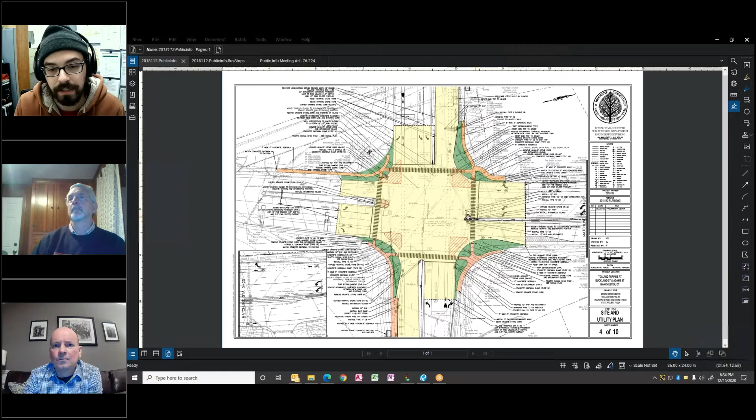Zoom in here a little bit. So as Jeff mentioned, the main change that'll be most obvious to everybody is the removal of the channelizing islands. There's a channelizing island on each corner today that causes some issues with confusion relating to the control and operation of the intersection, so the goal is to remove these in their entirety. As part of that, we're able to tighten the intersection up a bit by bringing the radius of the right-hand turns closer to the center of the road to improve that.

As you're probably aware, we recently did some work on Adams Street, some repaving and restriping. Our plan is to continue the new sidewalk we installed up to the intersection, to create some new crossings on the west side across Tolland Turnpike. The plan is to provide some directional crosswalk ramps and make revisions to the dividing median islands that are currently out there as well.

It'll be a standard traffic signal, and the operation will be very similar. However, we'll be adding some of the same features that we have at the sister location. We'll be proposing another flashing right turn arrow to coincide with the right turn movements against the crosswalks. There'll be blank out signs for no turn on red during periods when pedestrians are crossing with the major through traffic movements. It'll also likely include internally illuminated street name signs to help with better guidance through the intersection.

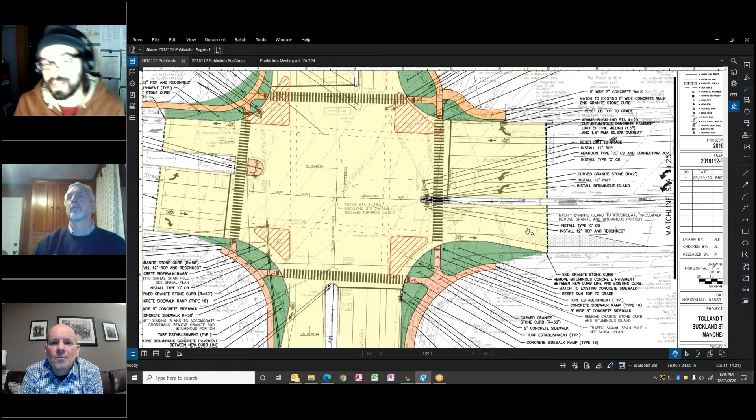Part of the plan on the northeast corner is to take what's currently 3 lanes wide and reduce that at the intersection to 2 lanes, allowing the bikes to transition safely and providing a bit of a buffer in that lane before reaching the first plaza on the right going northbound. That'll keep the double left turning traffic in the center and leftmost through lanes, instead of how everybody spreads out across those 3 lanes today.

A couple other notable improvements I'll mention: we're looking to add more formal bus stops for the 2 major bus routes that come through on Tolland Turnpike.

Taking a moment here for the computer to load. So on the right-hand side of the sheet here, you can see this is Tolland Turnpike heading west towards the plaza and towards the cemetery.

What we're proposing to do here is install a new sidewalk to replace the old asphalt sidewalk that's out here, to provide a full pull-off area for buses, space for the bike lane to transition by, and to provide a nice waiting area with bus stops. Buses can pull up, people can safely disembark, and make bus route changes if need be.

The plan is to continue and replace the sidewalk up to the first driveway where it sort of ends today. This will add a little bit of safety to the intersection as well, and provides the opportunity for the bus to fully exit the travel lane.

It's very busy through here with crossing traffic, so this allows the bus to stop, people to disembark and board safely, and allows space for the bus to transition back into the travel lane, where today it's partially in the shoulder, partially in the travel lane at times when it makes stops at these bus areas.

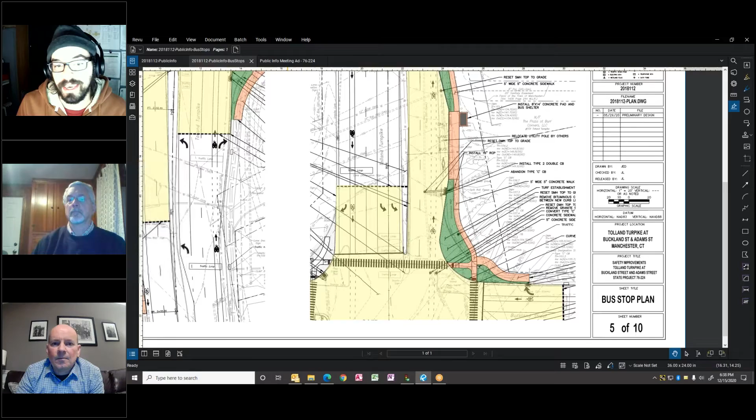On the opposite side of Tolland Turnpike, going the other direction, heading east towards North Main Street, we're looking to propose something similar. It's a little tighter here between the intersection where Adams Street is towards the top of the page and that first driveway into, I think, an old gas station.

So again, we want to provide a bus pull-off area, a raised sidewalk area for people to wait, a bus shelter, and something similar to a more urban bikeway, bringing the bike lane around and keeping it out of the line of the bus, as it's really kind of narrow in this area.

So it's a little different, but we provide a way for the bike lane to continue safely to the bus stop here.

In addition to these particular roadway improvements, we're planning to make some minor drainage improvements to adjust catch basins and drainage spots within that area to keep the water out of there. So nothing new or major regarding drainage is really being proposed, other than adding it in a couple spots where it doesn't exist today in order to improve conditions during inclement weather.

As soon as this sheet loads, going back to the overall view—hoping it would go back to the main top-down view. I'll have to work on that for a minute. But that's pretty much our project in a nutshell at this time.

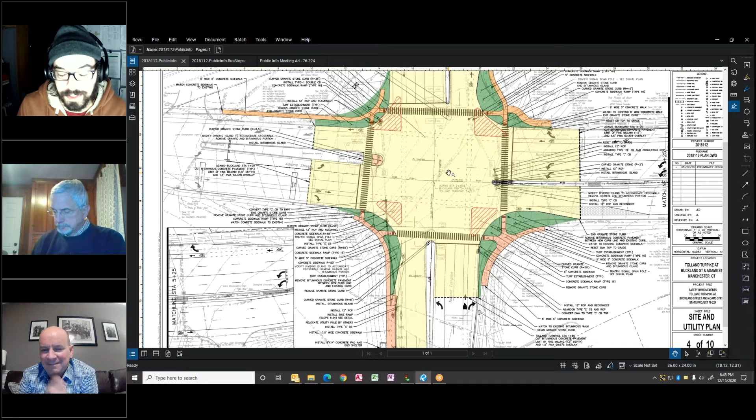So in order to accommodate those bike lanes, we shrank the travel lanes and the turn lanes, shaving about a foot or so off of each one, still within typical design parameters, but a little narrower, which actually helps the speed a little bit and gives us a little additional space to put those bike lanes in without having to really widen the road.

We are, however, widening the paved area a little bit where those bus stops are, in order to accommodate that bus pull-off area.

The bus pull-off areas are sized to accommodate the articulated bus, the bendy bus. They're minimum size as recommended from DOT in order to accommodate that bus, which does run on these routes, and the space it needs to accelerate to pull out and join traffic on the main road there.

So it's a little bit of give and take, but for the most part, to the average person, it'll appear that the road width and the intersection will be very similar, if not a little smaller, as they're driving through there. So I think it'll be a benefit.

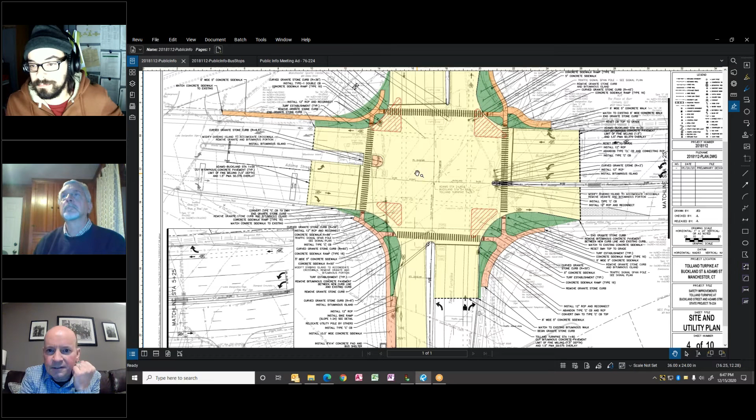Jeff, was there anything you wanted to add? No, I think that covered it, John. I just wanted to highlight the different areas where we were removing pavement and adding grass, and I think you covered that.

So Barbara said, thank you. Follow-up question: is the project already funded and approved?

The project's received commitment from DOT to fund, which is excellent. We're in the process of finalizing the design. We've provided our preliminary plan to them for their feedback. They have to do their own review and make some changes, so we're going to keep proceeding. There'll be a couple more submissions to DOT as required per their design process as part of getting the grant money for this work. And then we hope to have it out to public bid soon, later this coming year.

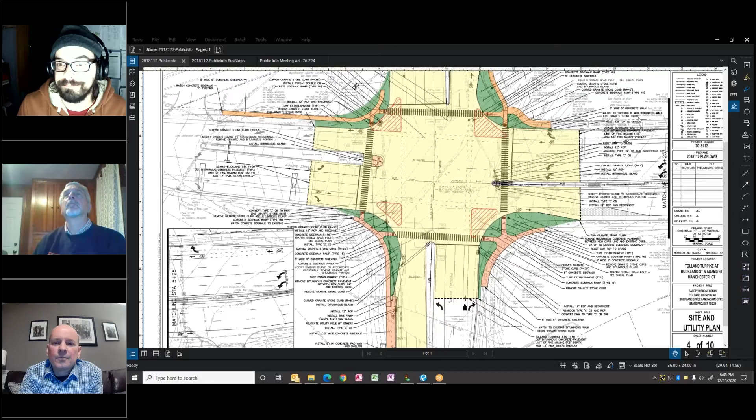Good question. Thanks.

Just one quick question again, sorry, back to the bus shelters. So on one side of the Tolland Turnpike road entering the plaza or corner, there's a railing on that side. Will that get removed for placement of the shelter and then reinstalled?

I'm sorry, I'm just trying to find out where that bus shelter is going to be placed. Yeah, it will be on the town property, but I wonder if you could zoom in a little bit, John, and show.

I believe the rail you're talking about is a split rail fence that is along the property line. Right, it should be in front of that, but we'll call up the plan here. Okay, thank you.

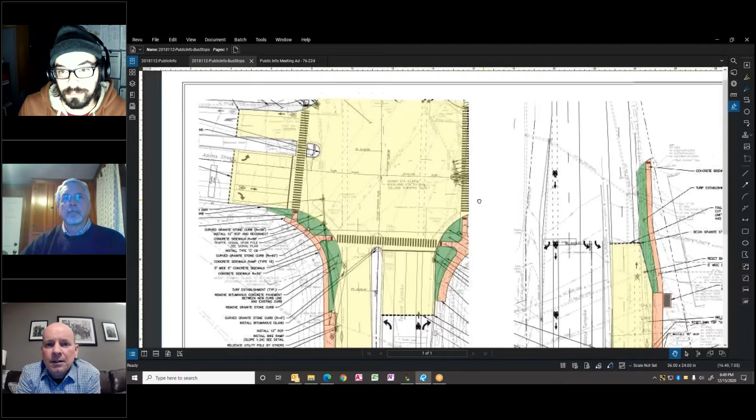Yeah, I believe that split rail fence is near the old driveways. I don't, well, before my time, I don't remember if it was like a gas station or something, but I recall seeing that, and I think it was meant to kind of close off that old access to it.

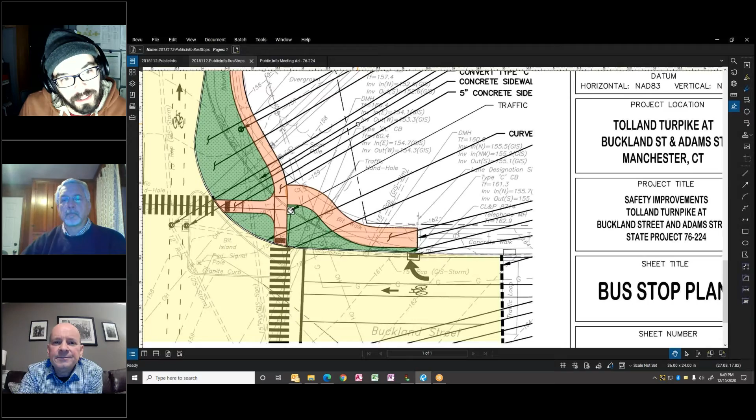John, could you explain what the street line is, that dashed line? So this is what we're looking at: this is southbound on Buckland Street, approaching Tolland Turnpike. And then on the left side here is Tolland Turnpike heading west towards Chapel Road.

There's a black dashed line. It's got longer dashes and these two shorter dashes, and then there's a hard angle, and then it kind of heads this way, if you can follow my mouse. That's the street line, the property line.

Everything on the colorful side of the plan sheet is in the town's right of way area that we control, and everything on the other side, toward the upper corner of the paper, is all private property. I believe it's part of the shopping plaza. So we're able to make these changes within our right of way on this side.

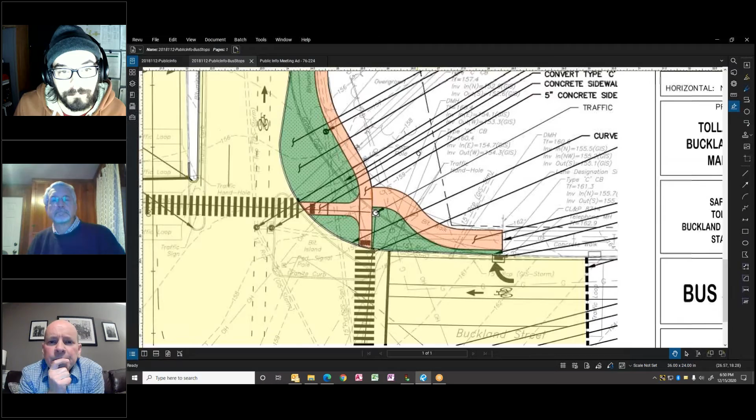Can you zoom up to the bus shelter? Yeah, so over here, where this area is, where the pad is, you could load from front and back of the bus, and then where the extended pad for the shelter will be, in order to have this clear path along the sidewalk.

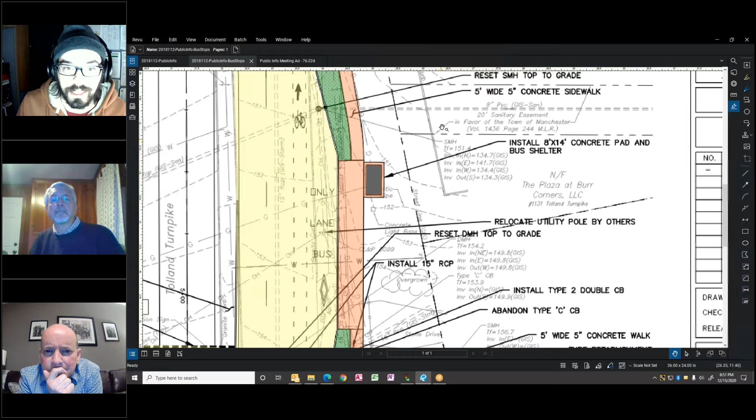It's near where on our side of the property line, the parking lot is currently paved in that plaza. So as you're approaching their first driveway, there's a big parking area here. As you were to pull into the plaza on the right, this is that corner of the parking lot.

It might be a little easier to point out on Google Maps here. So I believe if you're able to see this, in the center of my screen here, there's a big blob of asphalt.

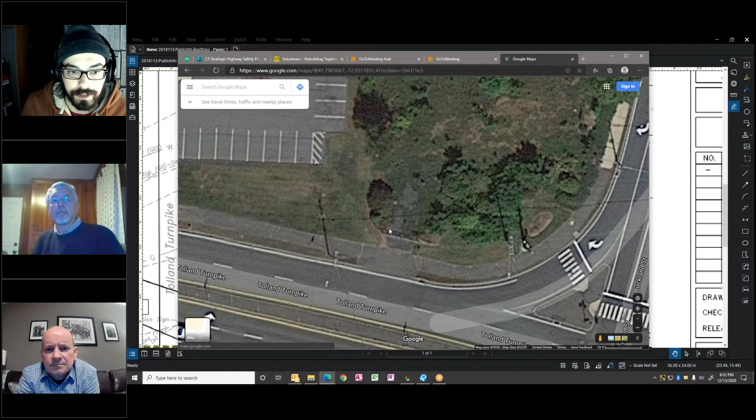I believe this is one of those split rail fences, and I believe this is on the private property. And then over here in the upper left of my window, here's that parking lot I was mentioning. The bus stop area will be just past that, the shadow of this utility pole that you can see, just left of center.

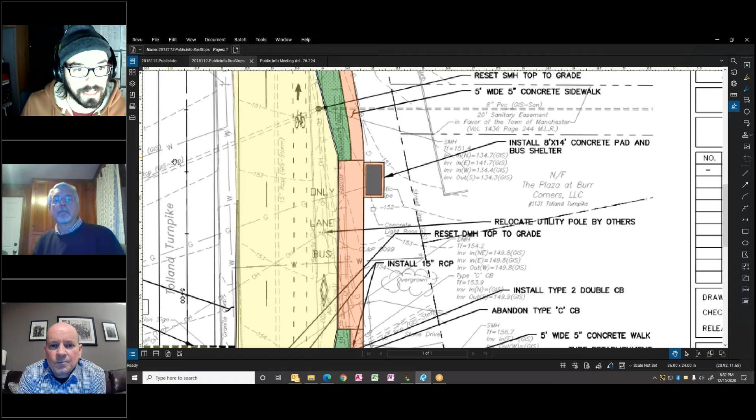So if I go back to the plan, these double lines are that corner of the parking lot of the plaza that I was just showing.

So we'll take a look. Actually, you know what, it looks like right here is that split rail fence. So if the split rail fence isn't in good condition, it actually looks like it is on our side. That's something we'll take care of as part of the project to clean it up.

This particular area should be generally fairly flat, so there shouldn't be a need for fencing behind the sidewalk, but we'll evaluate it. If there's a need, then we'll definitely look to install that.

The bus shelters, I believe there's some utility poles nearby that have illumination on them, so there'll be typical roadway lighting in the area of the bus stops. And then as part of replacing the traffic signal, we'll be looking at adding any additional illumination at the immediate intersection that could possibly be incorporated into the signal poles themselves, which I'm sure you've probably seen driving around in other locations.

So, does that answer your question? Yes, thank you very, very much. And it's good to know that we'll be adding additional lighting in that area, because with the bus shelter it's good to have additional lighting. So thank you. Okay, thanks.

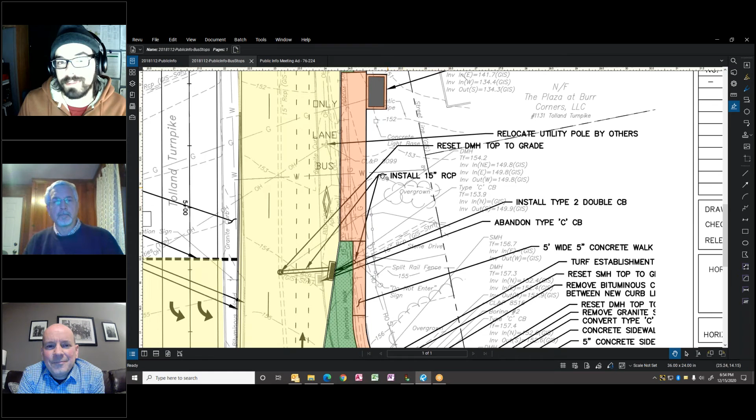No, I appreciate the feedback. As we develop the project, we'll take a closer look at the lighting to make sure. It's been a little bit since I've been out there at night, and I could understand it being by the plaza, being pretty dark in that corner. So we'll take a look at it and see what we can incorporate.

It's a good point. Yeah, there is currently a pole there. I think it's like a 50,000 lumen light, but I think that's the only thing that's there. Okay, thank you.